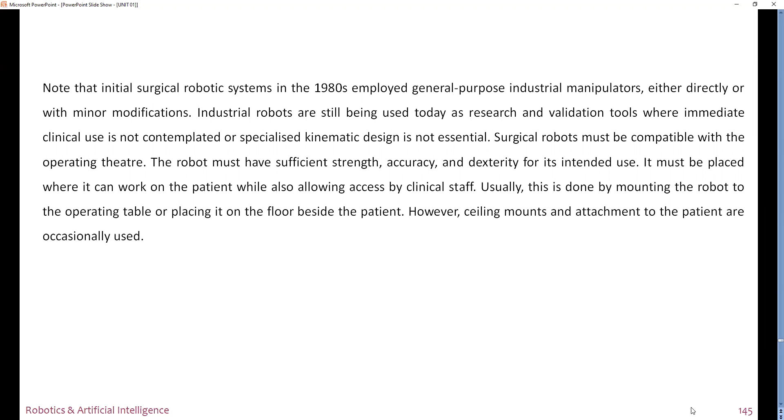Now, mining. In order to enhance productivity, access unworkable mineral seams, and reduce human exposure to the inhospitable environment of dust, noise, gas, water, moving equipment, robots are used.

In coal mining, room-and-pillar mining is accomplished by repetition of a well-defined cycle of cutting coal, removing coal, and supporting the roof. When a robot is used, the ability to maneuver it in highly constrained corridor-like environments and to accurately cut coal is required. Data from the laser range scanner can be used to model the environment and to compute the position of the robot.

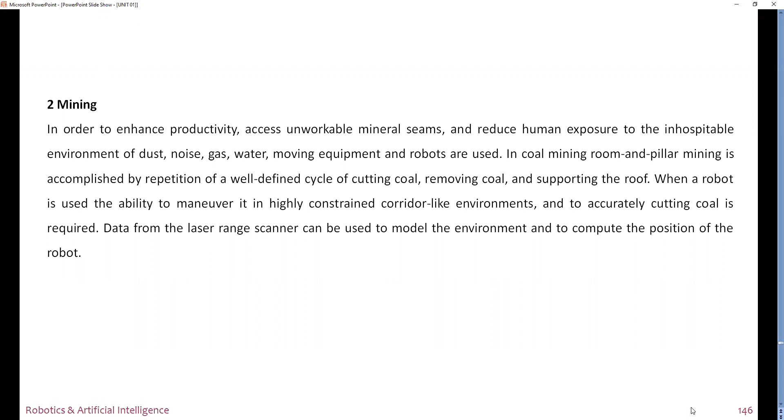Now, space exploration. Already, all these applications we have seen in service robots. When I discussed the point service robot, at that time I have shown you all the pictures. These are nothing but service robots.

Space exploration of the planets, moons, and other near bodies in space is a clear goal for the international space science community. A robotic approach to explore these bodies has the benefit of being able to achieve many of the things a human could do, but at lower cost without endangering human life. To be effective, such robotic systems must be versatile and robust, with cost reduction becoming increasingly important.

There are a variety of tasks that robots can do in space, including space manipulation, that is servicing equipment in space, surface mobility, and planetary exploration. You know that NASA has sent a wheeled robot on Mars.

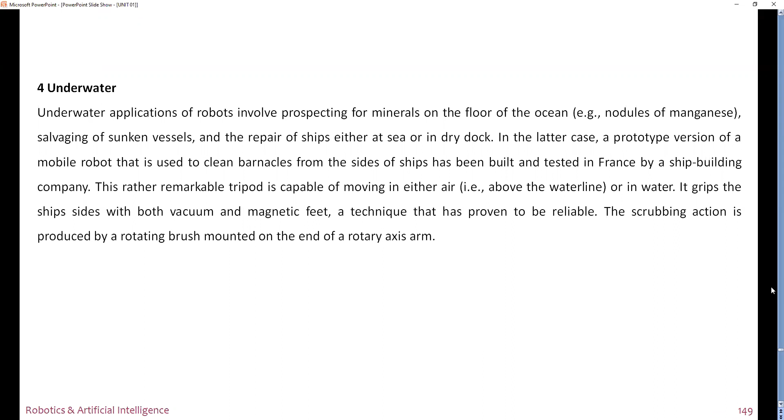Then next is defense. The defense people, namely the Air Force and Navy, are both interested in mobile firefighters. These devices are equipped with infrared sensors, and could react more quickly than people in an emergency and in extremely hazardous situations. Other defense applications of robots will be on the battlefield itself, although it is not inconceivable that robots might someday be used to fight other robots. More realistic short-term applications from the defense point of view would be in the areas of surveillance.

For example, guard and sentry duty, mine sweeping, and artillery loading devices. The application of robots for surveillance and guard duty can be in power generating plants, oil refineries, and other large civilian facilities that are potential targets of terrorist groups. The robots for these applications would probably be mobile, running on wheels, treads, or tracks, equipped with some form of vision system and other types of sensors, for example infrared, and even have defensive and/or offensive capability.

In fact, several police forces, for example those in New York City and in London, have already employed prototypes of this class of robots for bomb disposal. Therefore, this is the application of robot in defense.

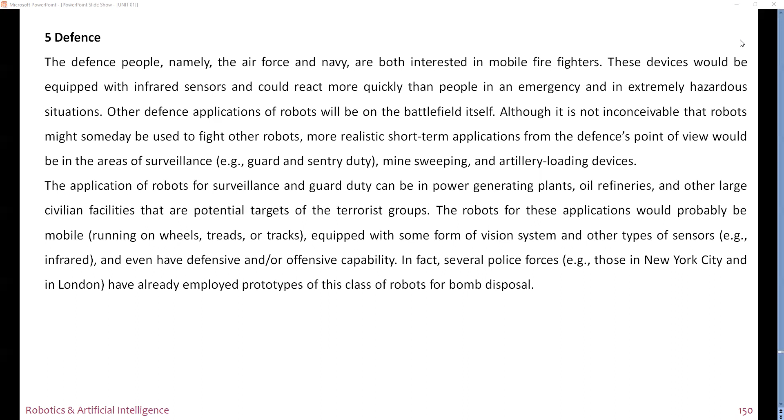Now this is all nothing but applications of robots. Now we have to consider robot economics and safety. When we are going to implement this robotic system in the factory, or in defense, or in medical, or in space exploration, we have to consider the economic aspect. Economic means money associated with robot implementation, and safety issues associated with robot usage.

Therefore, robot economics - the success of any commercial undertaking has to be measured in terms of financial performance. See, this is a very important statement. Everywhere finance comes into the picture. The most brilliant technical innovation is a failure if it results in money lost by the entrepreneur or his shareholders. Robots are no exception to this rule. No matter what the social benefits are, no matter how clever the technology, no matter how pretty the robot is to watch, every proposed investment in robotics has to pass the test of a critical financial appraisal.

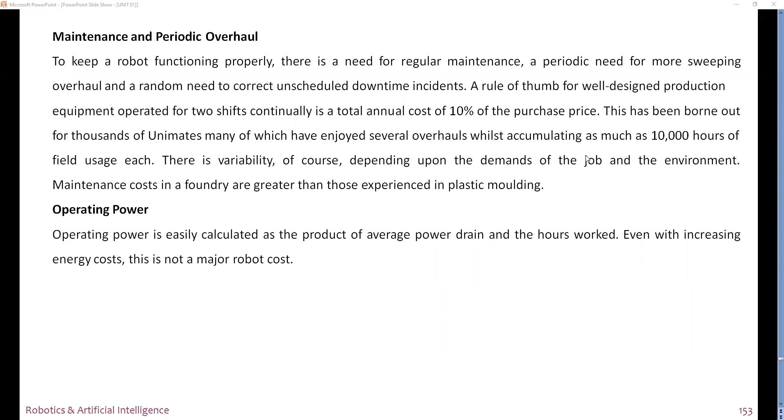Next is finance. In some cost justification formulas, one takes into account the current cost of money. In others, one uses an expected return on investment to establish economic viability.

And next is depreciation. Robots, like any other equipment, will exhibit a useful life, and it is ordinary practice to depreciate the investment over this useful life. Since a robot tends to be general purpose equipment, there is ample evidence that an 8 to 10 year life running multi-shift is a conservative treatment. Therefore, after up to 8 to 10 years, you can use any robot, and after that you can scrap it.

The following observations are also made on potential benefits. Increased productivity - these are the advantages when you are using the robot. The prime issue in justifying a robot is increased productivity. Industries are interested in shielding workers from hazardous working conditions, but the key motivator is the increased productivity by introducing a robot that can operate for more than one shift continuously and thereby multiply the production rate.

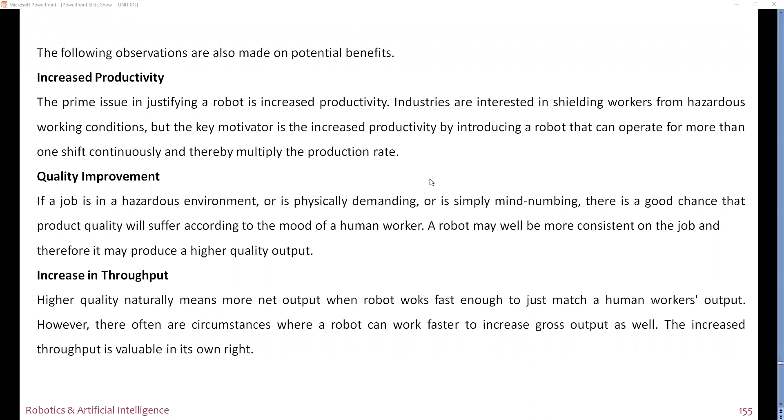Now, next point is robot safety. It is said that robots take over hazardous jobs, but at the same time, new risks are involved. One thing that must be kept in mind is that a robot is a type of automatic machine, a very sophisticated one, but a machine nevertheless, because it is programmable. If you cannot program the robot, it will not work. Therefore, it is not just a machine, it is a programmable automatic machine. It has to be treated with respect like any other piece of equipment.

Accidents involving robots can happen just as with other machinery. The robot workplace must be watched to prevent operators from hurting themselves through carelessness, exactly as it is done with other automated machines. Robots, however, may need more attention since their workspace is much larger than the occupied floor space, and people may not be aware of the danger of the moving manipulator.

Therefore, you have to take care of robot safety also, that is, you have to use fencing in the robot area. There are figures that I will show.

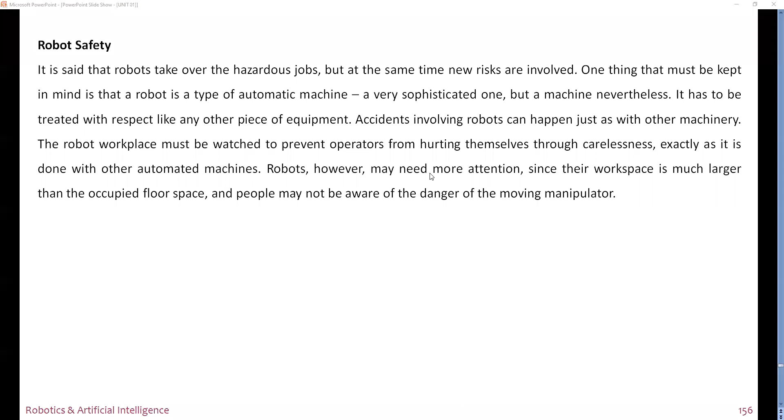Now some of the possible ways accidents can happen are as follows. The arm of a robot suddenly shot up as the oil pressure source was cut off after the robot ended work.

A robot made a motion that was not part of its program. A robot started moving as soon as its power source was switched on, although its interlock conditions were still not ready.

When operating alone, a robot destroyed the work it was to weld because of a mistake in program instruction. During hot summer weather, the arm of a robot sprang up, although it had otherwise been working normally. Therefore, these are some of the possible accidents that can happen.

The most common causes of malfunctions are reported to be electrical noise, oil pressure valve troubles, encoder related problems, electronic malfunctions, and mistakes by human workers.

Safety measures for using robots must be imposed for the following reasons. For programming, humans must enter the workspace of the robot. Monitoring, tool changing, inspection, and other operations involving robots or their peripheral equipment are still done by humans. To correct problems with peripheral equipment, it is necessary to enter the workspace of robots.

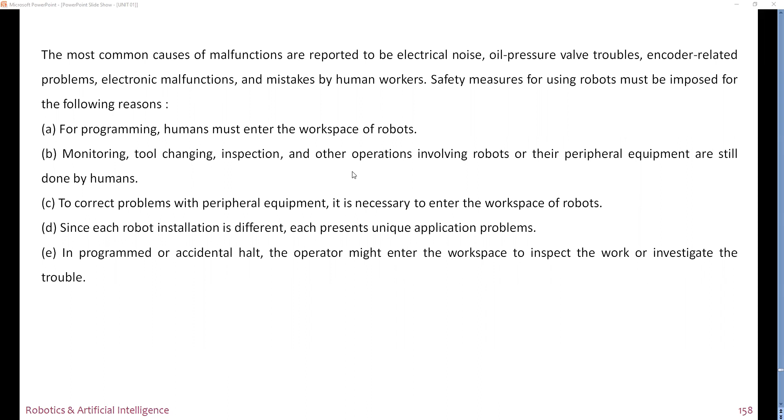To take care of the issues arising out of the above reasons, the following three aspects must be looked into. First, the design of a reliable control system to prevent malfunctions. Second, the design of the workstation layout. And third, training of plant personnel, that is, programmers, operators, and maintenance staff.

While the first aspect depends on the robot manufacturer, the other two must be taken care of in the plant itself. The following guidelines can help to remove hazardous situations to robot personnel, factory workers, visitors, and to the robot itself. Now in that first point, the robot working area should be closed by permanent barriers, for example, fences, rolls, and chains.

This is to prevent people from entering the area while the robot is working. The robot's envelope diagram should be used in planning the barriers. The advantage of a fence type barrier is that it is also capable of stopping a part which might be released by the robot's gripper while in motion.

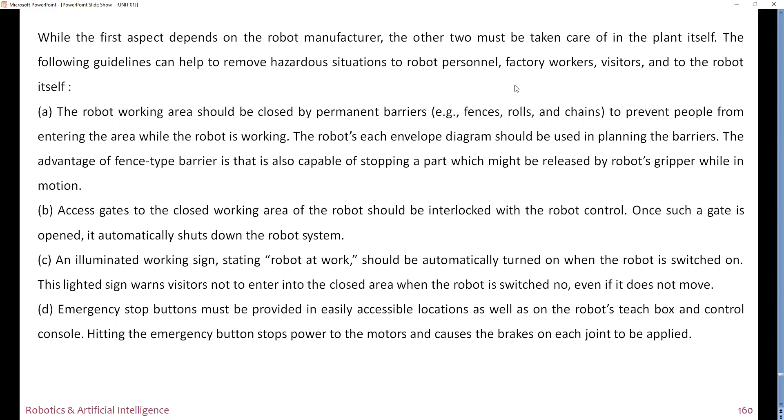Emergency stop buttons must be provided in easily accessible locations as well as on the robot's teach box and control console. Hitting the emergency button stops power to the motors and causes the brakes on each joint to be applied. Pressure sensitive pads can be put on the floor around the robot that, when stepped on, turn the robot controller off.

Emphasize safety practices during robot maintenance. In addition, the arm can be blocked up on a specially built holding device before any service work is started.

Great care must be taken during programming with the manual teaching mode. The teach box must be designed so that the robot can move as long as a switch is pressed by the operator's finger. Removing the finger must cease all robot motions.

The robot's electrical and hydraulic installation should meet proper standards. This includes efficient grounding of the robot body. Electric cables must be located where they cannot be damaged by the movements of the robot. This is especially important when the robot carries electrical tools such as a spot welding gun.

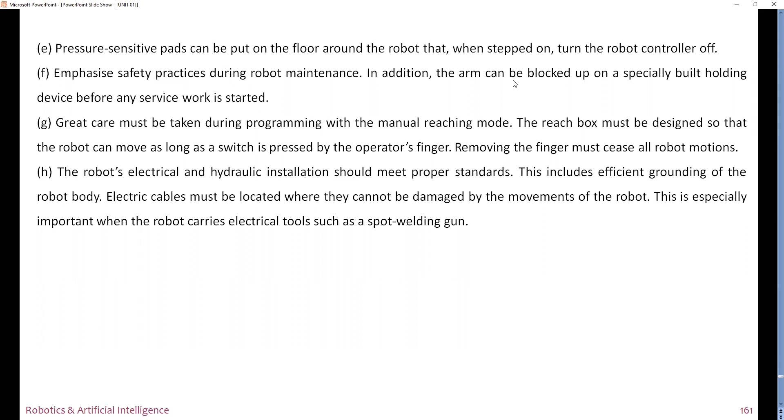This is H, then this is I. Power cables and signal wires must not create hazards if they are accidentally cut during the operation of the robot.

If a robot works in cooperation with an operator, for example when a robot forwards parts to a human assembler, the robot must be programmed to extend its arm to the maximum when forwarding the parts so that the worker can stand beyond the reach of the arm.

Mechanical stoppers, interlocks, and sensors can be added to limit the robot's reach envelope when the maximum range is not required. If a wall or a piece of machinery not served by the robot is located inside the reach envelope, the robot can be prevented from entering this area by adding photoelectric devices, stoppers, or interlock switches in the appropriate spots. Some robots are supplied with adjustable mechanical stoppers for this purpose.

Now, whatever we have seen, robot safety - see that fencing is there around this robot so that when this robot is in working condition, no one can enter. Only a human will enter when this robot's work stops, for programming, replacing some joints, or carrying out some maintenance.

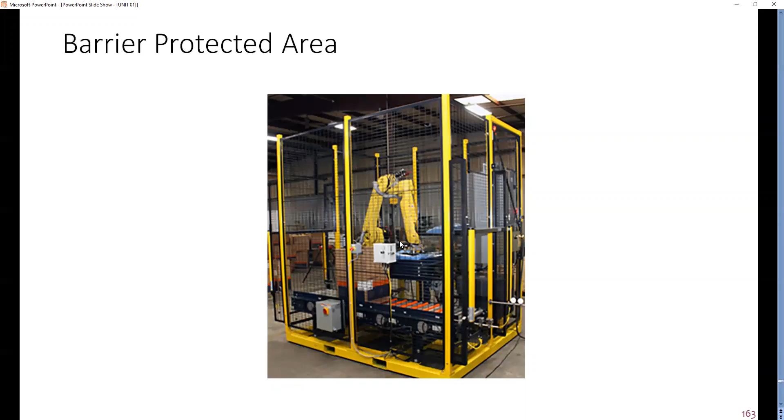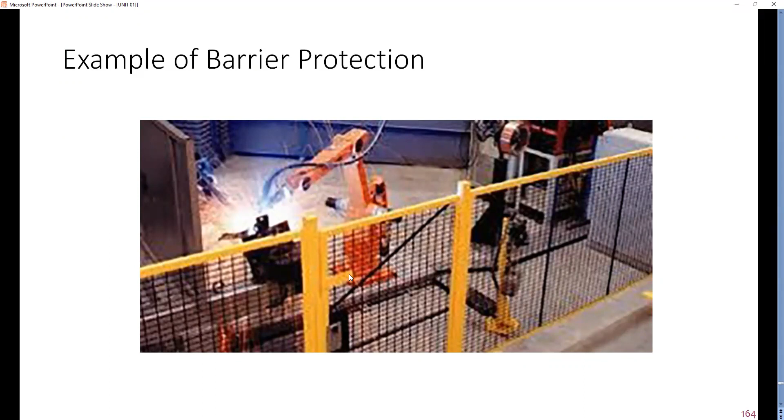Example of barrier protection - see that barrier protection again. Here fencing is there, these doors are there, so that when these robots start working, maybe drilling operations are carried out. See that these doors are closed. Humans or anyone will enter this fence only when these robots are not working.

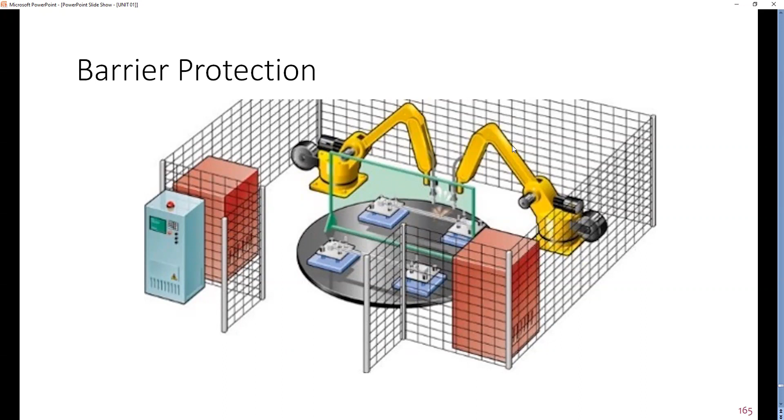Another approach states that only robots themselves are able to detect the approach of humans. Therefore, the solution to the safety problem is to provide a sensor system that can detect intruders entering the robot area while it is in motion. The American National Bureau of Standards divides the sensor systems into three levels.

Level 1: perimeter penetration detection around the workstation. Level 1 systems provide perimeter penetration detection around the robot workstation. These systems provide an indication of an intruder crossing the workstation boundary, but they do not necessarily provide any information regarding the location of the intruder within the workstation.

The simplest safety strategy approach might be to use the level 1 system to alert personnel that they are entering a robot workstation and that they should exercise extreme caution, or to provide a preliminary signal to the robot control system to check the status of other safety sensors.

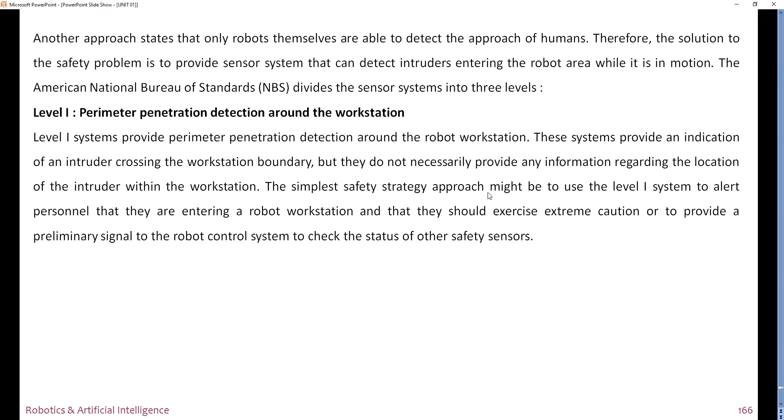Level 2: intruder detection within the workstation. Level 2 systems provide detection in the region between the workstation perimeter and some point on or just inside the working volume of the robot. The actual boundaries of this region are dependent upon the workstation layout and the safety strategy being employed for a particular robot design.

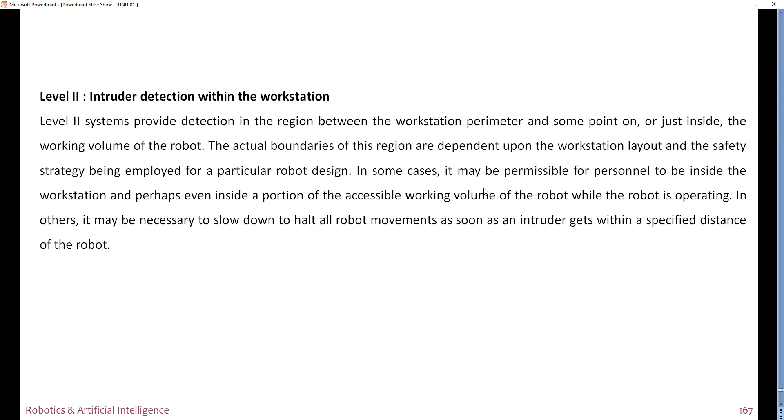In some cases, it may be permissible for personnel to be inside the workstation and perhaps even inside a portion of the accessible working volume of the robot while the robot is operating. In others, it may be necessary to slow down or halt all robot movements as soon as an intruder gets within a specified distance of the robot.

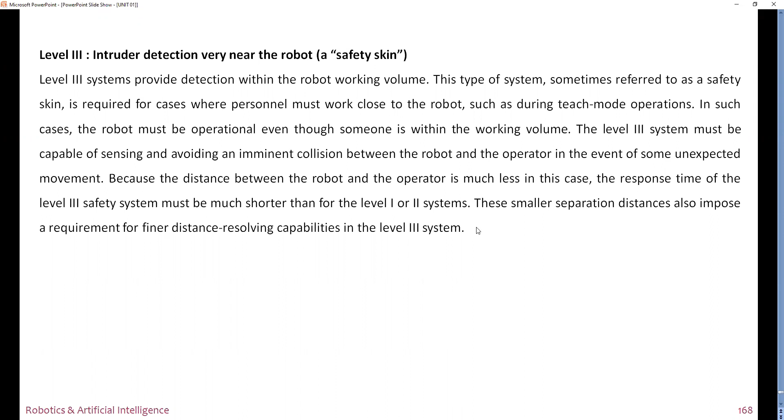Therefore, these are nothing but the 3 level sensor systems used in the robot for robot safety and operation.